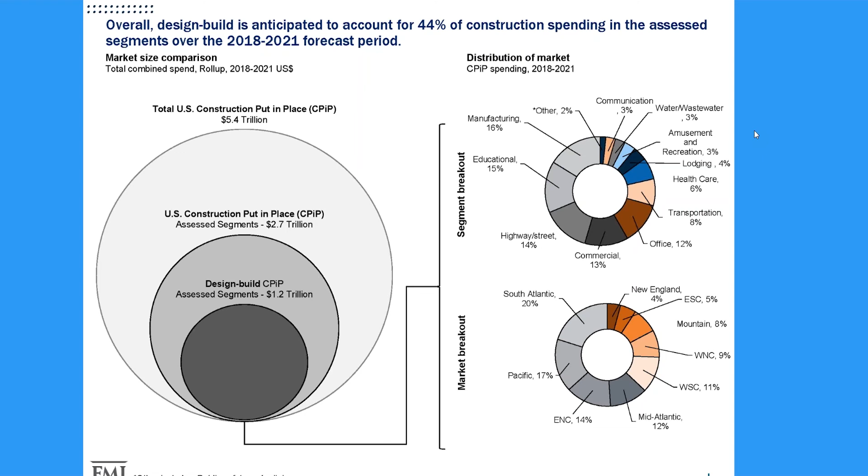And so looking at a year-by-year basis, from 2013 to 2021, we can see that 2013 to 2017 had a very, very strong increase. And really that was driven by the expansion in the market and economic recovery continuing. And from 2018 to 2021, we continue to see that growth. Design build is anticipated to grow at 18%. That is a significant growth rate.

And on a year-over-year basis, from 2018 to 2021, it's 6% annual. And if we look at overall construction in the same segments for that time period, it's only at 4%. So design build is growing faster than the overall marketplace.

And the other thing to take into consideration is not only is design build growing on a yearly basis, but as a percentage of spending, it consistently gains share as a growing delivery method utilized. So starting in 2013 and going all the way to 2021, we're going from roughly under 40% to over 44% in 2021 on a yearly basis.

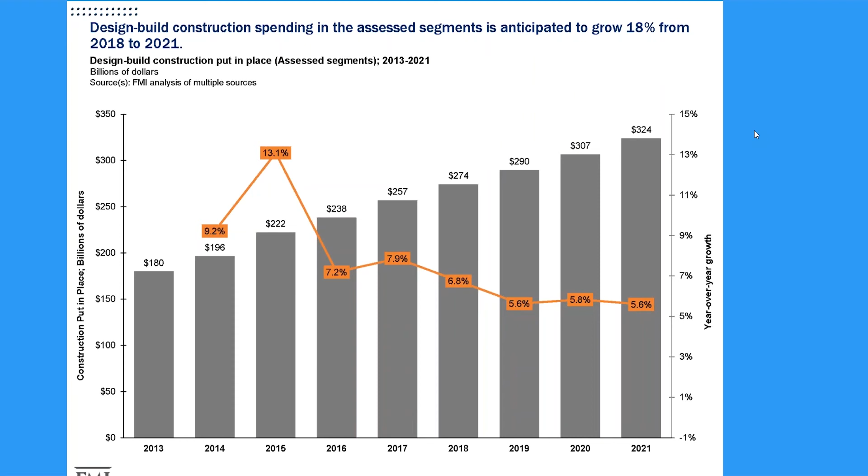And you think about the owners here, the contractors, they're all gaining the experience and really have the knowledge base to be successful, and have shown that design build is an extremely effective and efficient way to deliver their projects and programs overall. And really the quote that Lisa mentioned earlier, that it's no longer an alternative, that is absolutely true.

And through our interviews, we heard on a consistent basis that design build represents the majority of construction programs for some large owners, just purely based on the ability to deliver in a quicker time span, and really the benefits associated with utilizing design build.

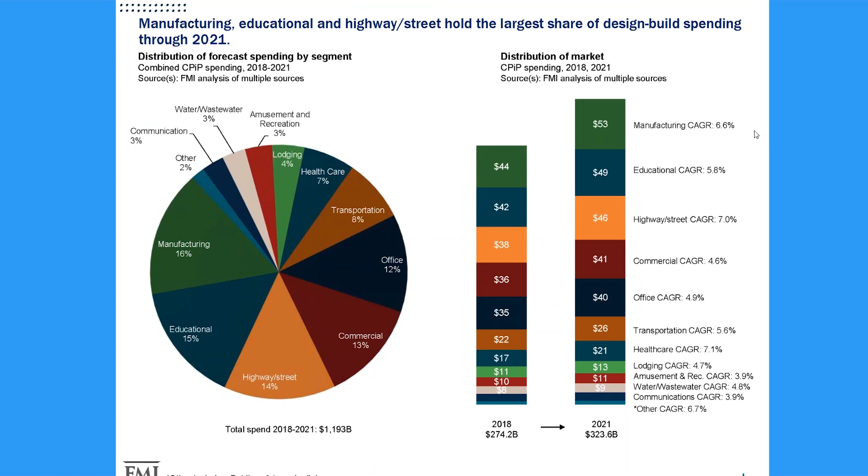And overall, what we see the trend is the use of alternative delivery methods in general is growing and will continue to do so, particularly design build, as projects become more complex and need to be delivered in an expedited fashion.

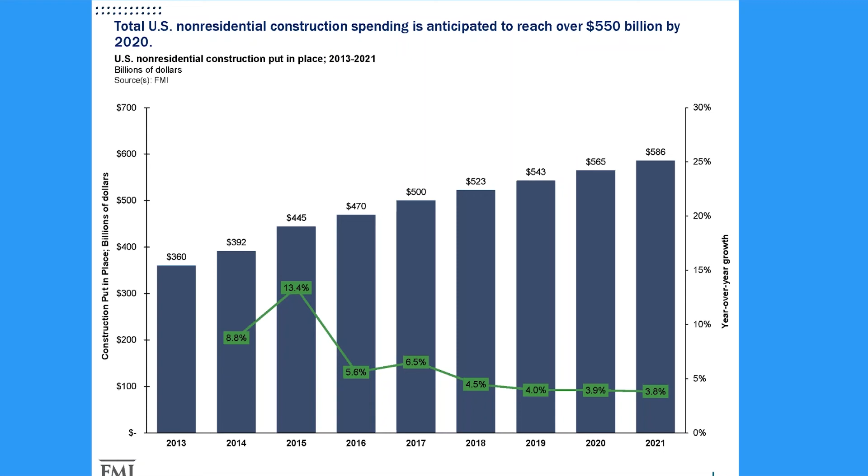Growth continues, but when we look at design build, it has grown as a percentage of construction spending, particularly non-residential, at a very strong pace, representing about 45% of non-residential construction spending over the forecast period. So over that 2018 to 2021 time period, 990 billion spending in design build, and really the leading sectors: education, manufacturing, commercial, office, and the same geographic regions being the South Atlantic, Pacific, Mid-Atlantic, and those areas growing.

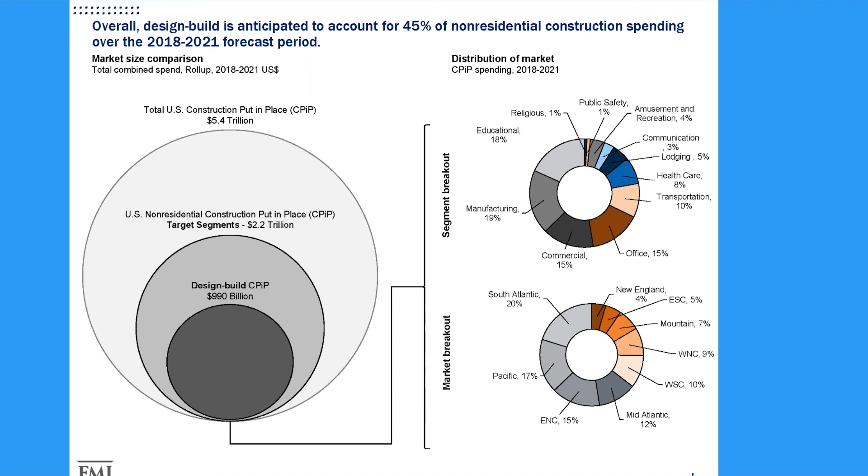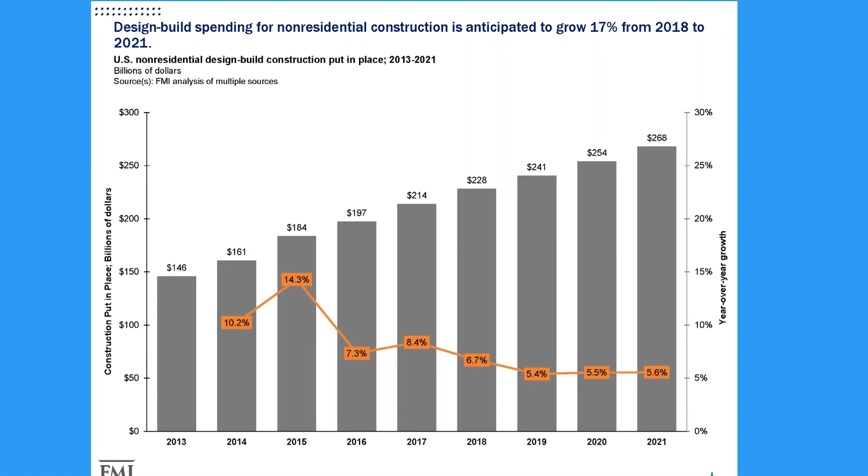In thinking about overall growth of 18%, and why in non-residential it's 17, it's mainly driven by it being a higher number, so the growth is not as strong because it's reached such a higher percentage. So really the factors influencing design build in non-residential continue, and it's going to remain a strong percentage of overall spending there, which is great. And you have to say DBIA has done a great job of really pushing this in the marketplace, and you can see that in the growth of spending year over year.

So the trends and drivers were a combination of the survey and the interviews. One of the main questions we wanted to get data around was what's really influencing owners in selecting a project delivery method. What characteristics are most influential? And what stood out was delivery schedule, ensuring the method was aligned with their goals and objectives, cost, and then the experience of firms participating in the market.

And what design build does extremely well is the ability to deliver projects in an expedited fashion, the ability to have the contractor, the designer, the engineer involved early with the owner to collaborate and identify those key goals and objectives to ensure that the needs of the stakeholders are all met and that the most value is derived out of the product that's delivered. So what's important to owners when they're selecting is absolutely aligned with what design build is delivering, further driving continued use of the method.

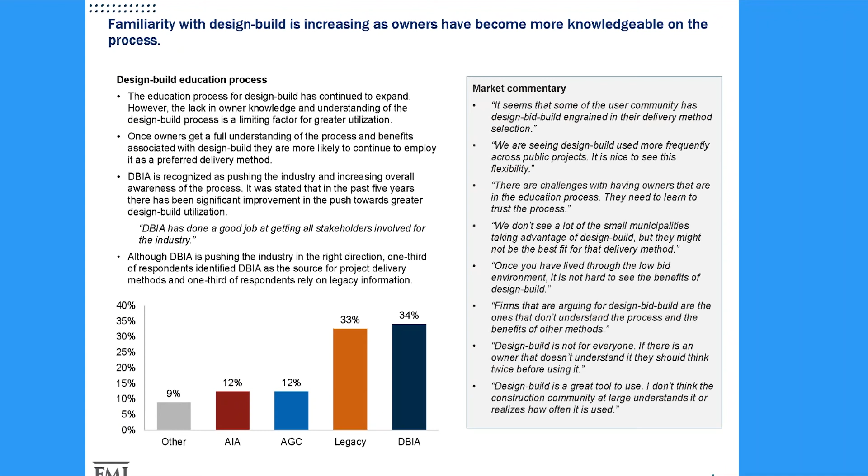And looking at the next 5 years, where market participants believe they will see an increase: overall, alternative delivery and specifically design build show a pretty strong increase in terms of what's going to be used in the next 5 years, whether how contractors are going to deliver projects or how owners are looking to have their programs and projects delivered. It's very clear here that it is the anticipated delivery method that will be used.

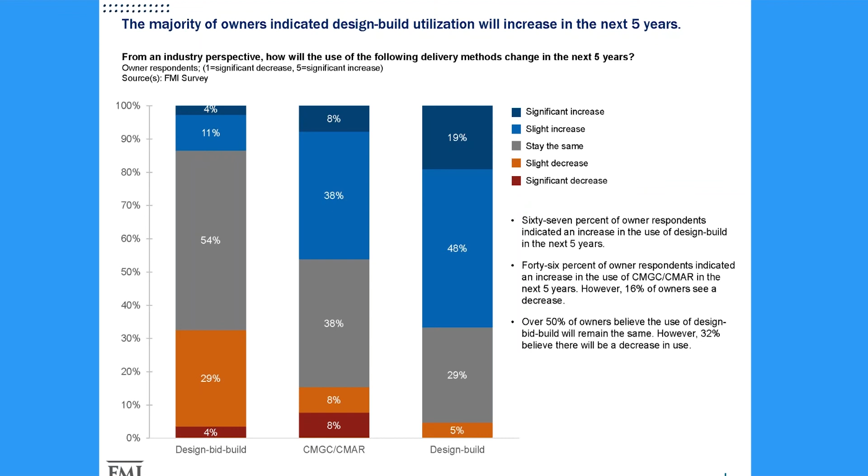Taking a look at the highway, street, and water, wastewater market. Again, starting out with the market sizing, we see that over the forecast period, design build will represent slightly over 200 billion. Highway, street compared to water, wastewater is going to be the significant percentage, but if you look at total construction, highway, streets is a larger segment, so it breaks out fairly similarly. The strongest growth markets, representing a sizable portion, are the South Atlantic, the Pacific, and the Mountain. So those similar geographies are really driving the construction growth for design build.

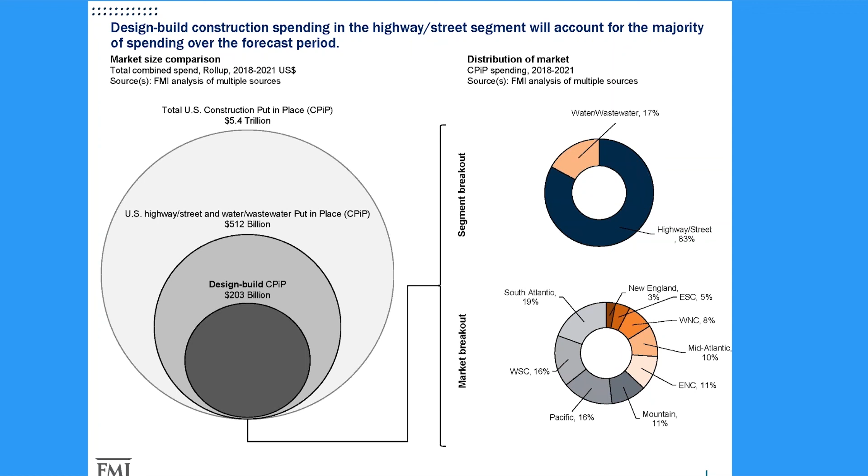Looking at year-over-year growth in spending for design build, here we see from 2018 to 2021 a 21% increase. So a lot of the growth is coming from highway, street, and water, wastewater. We hear and see a significant number of owners using design build for more than 50% of their program spending. So it's not surprising to see such a strong growth rate and a good outlook over the next 5 years, because the use of it is very strong, and there are very favorable market conditions as projects become more complex.

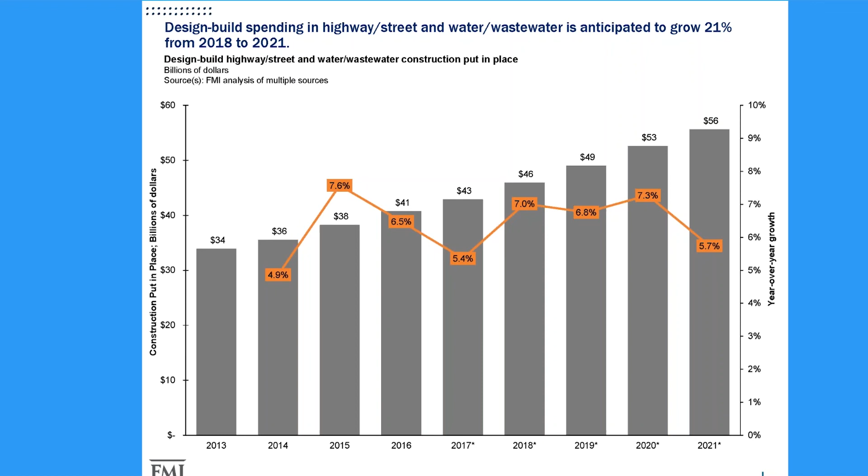The experience is growing, so not only is it a delivery method for over $500 million projects, it's getting down to 25, even as low as 10 million, where owners are utilizing it. So it's not only a large project method, it's covering the full spectrum, and owners and contractors alike see it in that light and are utilizing it much more on smaller projects. Looking at the breakout of design build historic and forecast, the largest change was in highway, street, and water wastewater, from about 31% historically to 40% over the next 5 years. So strong growth in use of design build.

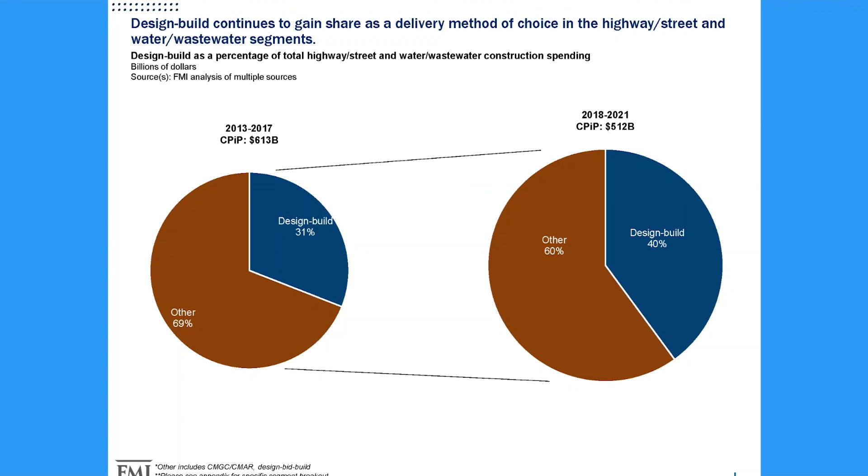And really the drivers here are schedule. The urgency of delivering these projects is pushed forward, and owners are able to accelerate their timelines. It was noted up to 12, 13 months before anticipated schedule. So top of mind is the ability to deliver these projects in that expedited fashion. Project complexity: as that continues to grow, owners are more likely to go towards design build. Size, and then outside expertise and staff experience. Those 5 key areas are driving use of design build in the water, wastewater, and highway, street market.

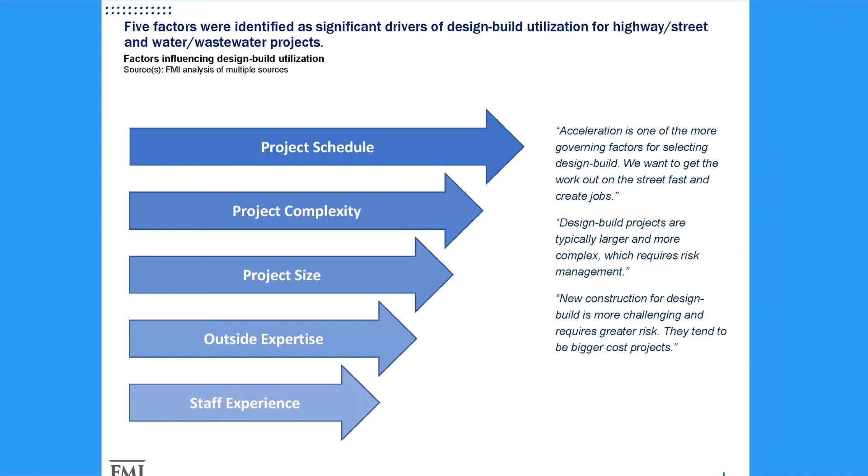And lastly is the size of projects. As I mentioned earlier, we see a higher number of projects under 25 million, really under 150 million, going towards design build as familiarity with the method grows, continuing the trend of greater utilization across the board.